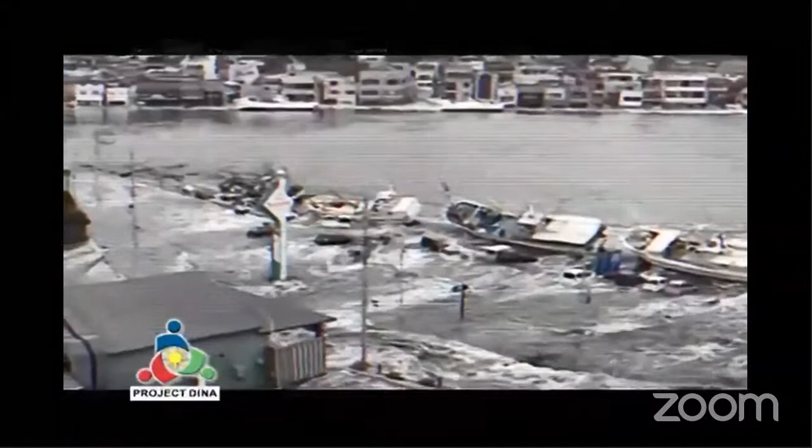Maaari ring magkaroon ng tsunami kung may landslide sa ilalim ng dagat, kung pumutok ang bulkang malapit sa dagat o sa ilalim nito, at kung may bumagsak na bulalakaw sa karagatan.

Ang tsunami ay may bilis na 800 kilometers per hour sa malalim na parte ng karagatan. Ngunit ang alon nito ay mababa lamang at pwede itong bumagal ng 40 hanggang 80 kilometro per hour sa dalampasigan. Maaring tumaas ang alon nito sa 10 metro o higit pa, sing taas ng bahay na may 3 palapag.

Para maibsan ang epekto ng tsunami, magtanim ng mga puno at bakawan sa tabing dagat. Magkabit ng mga karatula malapit sa dagat na naghahatid ng babala at paalala ukol sa tsunami.

Maglagay ng karatulang Tsunami Hazard Zone sa mga lugar na maaaring tamaan ito. Tiyakin ding mayroong directional signs patungo sa mga ligtas na lugar o evacuation sites. Siguraduhin maluwag at ligtas ang mga daang papunta sa mga ito.

Bumuo ng tsunami evacuation plan at magsagawa ng tsunami evacuation drill sa inyong komunidad. Sa pagdating ng tsunami, patunugin ang mga batingaw o alarm para bigyang babala ang mga residente.

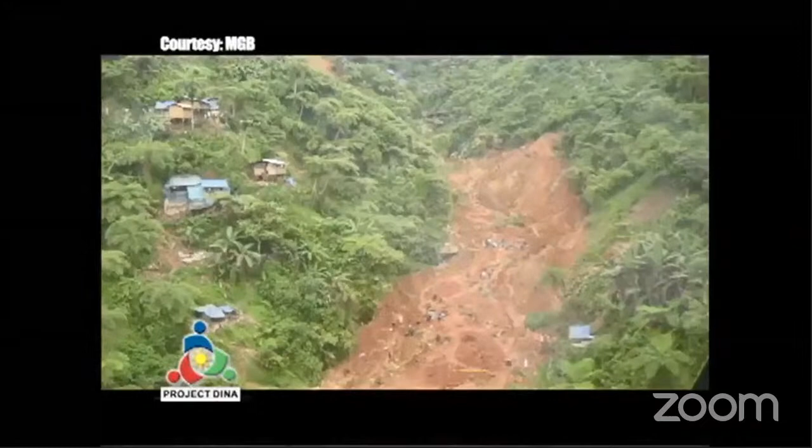Upang maibsan ang mga panganib na hatid ng landslide, huwag magtayo ng bahay o anumang struktura sa mga lugar na matatarik, malapit sa paanan ng bundok, at malalambot na lupa, at sa lugar na may mga history ng pagguho kagaya ng debris flow, debris avalanche, slump, mud flow, rockfall at iba pa. Alamin ang emergency at evacuation plan sa inyong lugar at siguraduhin pag-usapan ito kasama ang pamilya.

Sa oras ng malakas na pag-ulan o bagyo, maging alerto upang maobserbahan ang inyong kapaligiran sa mga senyales ng landslide. Lumikas kung kinakailangan at gawin ito sa madaling panahon, dala-dala ang inyong emergency survival kit.

Habang nagkakaroon ng pagguho ng lupa at ikaw ay nasa loob ng gusali at hindi makalikas, manatili na lamang sa loob at magtago sa ilalim ng mesa o sa matitibay na parte ng kabahayan.

Kung ikaw naman ay nasa labas, iwasan ang marahas na daanan ng landslide at magtungo sa ligtas na lugar. Kung malapit sa estero o ilog, maging alerto sa posibilidad ng biglaang pagtaas ng tubig.

Ang biglang pagbaba mula sa normal na level ng tubig ay maaaring senyales ng pagbara sa may taas na bahagi ng ilog dahil sa landslide at posibleng pagkakaroon ng flash flood o debris flow.

Kung ikaw naman ay nagmamaneho, maging mapagmatyag sa mga bumabagsak na semento, rumaragasang putik at mga nalalaglag na bato. At huwag tumawid sa mga tulay.

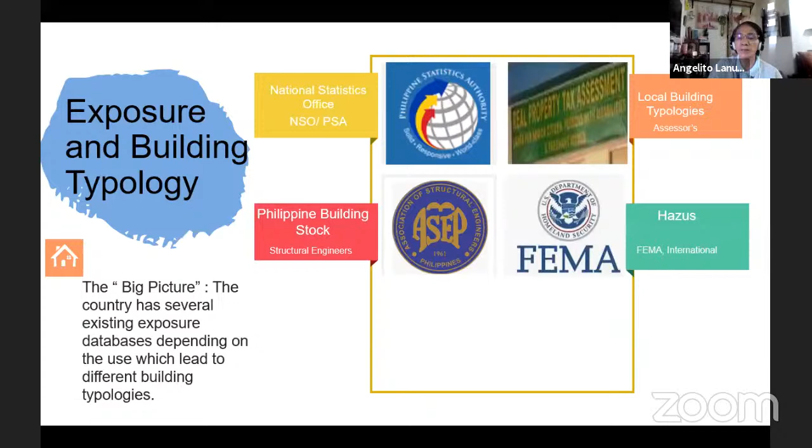Okay, so let's go back briefly to how PSA classifies buildings. The national census is conducted every 10 years.

So one of our dilemmas here: within 10 years, many buildings may pop up, or some hybrids may emerge, creating a gap in our database. And the census is based on number of housing units, not on number of buildings.

It has several approaches and categorization. Basically, it is based on materials, structural components, based on occupancy, and based on attributes such as the floor, year of construction, or the era of construction. That's the NSO's approach.

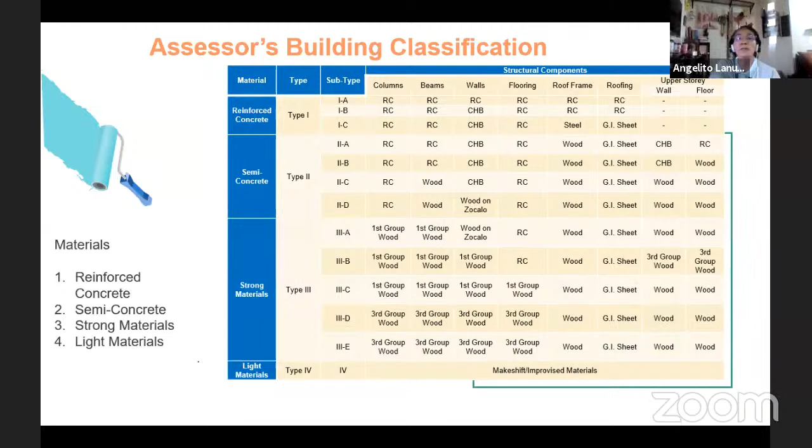So that's the question there, the missing part of this old classification. Although, as I mentioned, the assessor's office classification now has 5 categories to include steel structure.

For engineering building stock categorization, as I mentioned earlier, it is basically derived from the building classification of the US, and the categorization is based on several characteristics. Basically it includes materials - wood, and in this case, there's already the term masonry, and concrete, and steel.

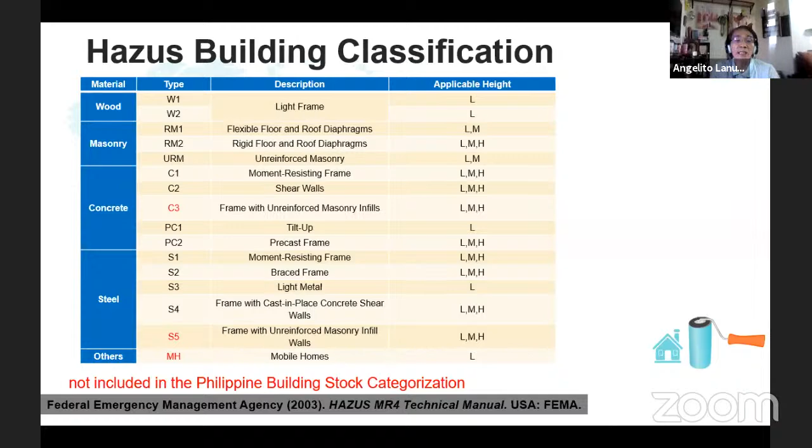If you're going to adopt the HAZUS building classification, it turns out many houses in the Philippines can't really be classified anywhere in it. So, basically, this is the suggested building classification, adopting more than half of the HAZUS or US building classification, in order to customize it to the needs of the Philippines.

So what I mentioned back in 2010 led to this result. So the origin of our new building typology or classification in the Philippines is basically derived from the Philippine building stock categorization, and it has more subtypes due to more details observed on structural types - such as materials, structure, building heights, and the era of construction. Later we'll discuss why there's significance to 1972-1992 in terms of the building code.

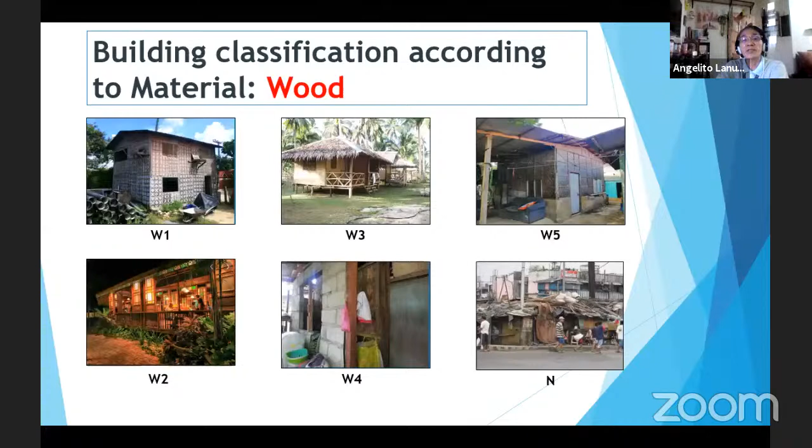Okay, so these are the pictures of W1 or wood one. This is easy enough to understand, or maybe it's already becoming rare because of our logging in the 70s until the 80s. So our wooden structures are becoming fewer. Okay, so that's W1.

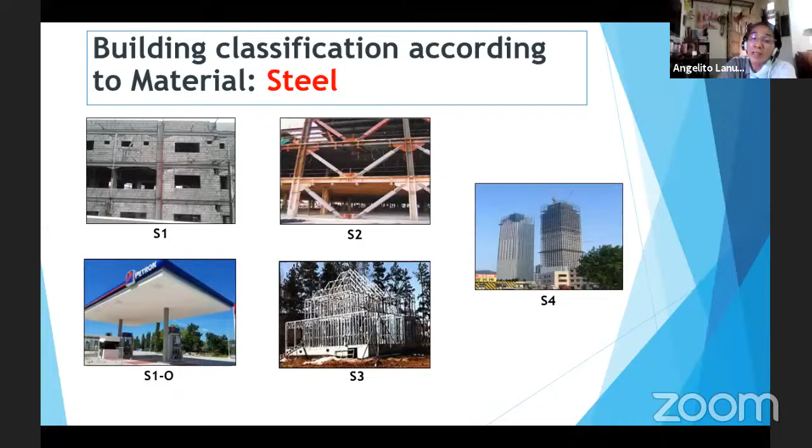They say if your materials are light, it's more resistant to ground shaking. However, we don't know its performance when it comes to severe wind. And then for the high-end, meaning expensive structures - here in S4, we replace concrete with steel beams and columns to form a frame. That's our S4.

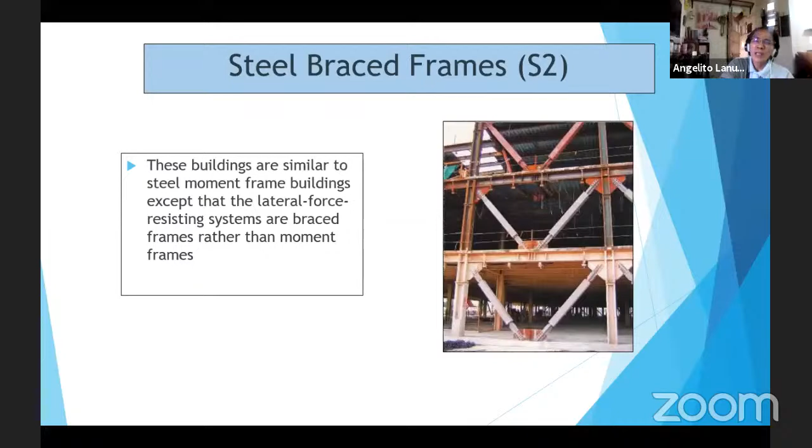So in S2, there's a diagonal bracing system. And then light materials as S3. Okay, this one has a shear wall, or S4 - shear wall again, poured concrete wall.

From all those projects, after our realization in 2010, although this doesn't exist yet in our code or any guidelines for classifying buildings - engineering building classification - this is what we recommended together with UPDI: the Philippine Building Classification, to include structures that truly exist on the ground somewhere in the Philippines. The ones marked in red are what we suggested to be included so we can have our own building classification in the Philippines.

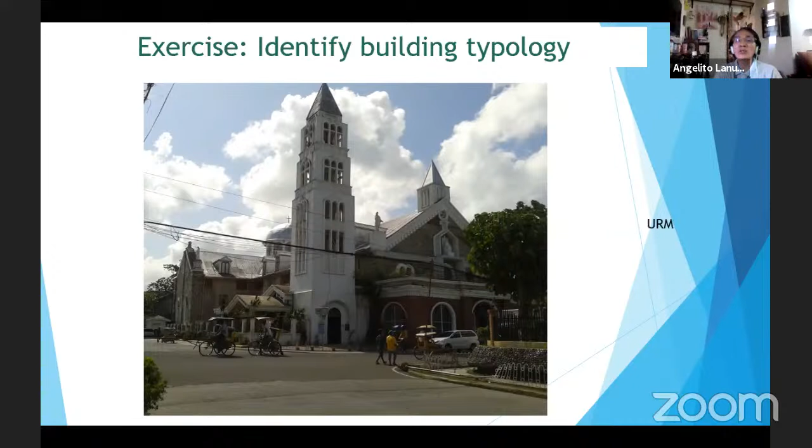Next picture - who can relate to this? Is this W1, W2, or W3? This is W1, because it's purely wood. And okay, this is a combination of masonry and wooden structure - wood on top, masonry at the bottom. Next picture, this one has posts - concrete at the bottom, wood at the top.

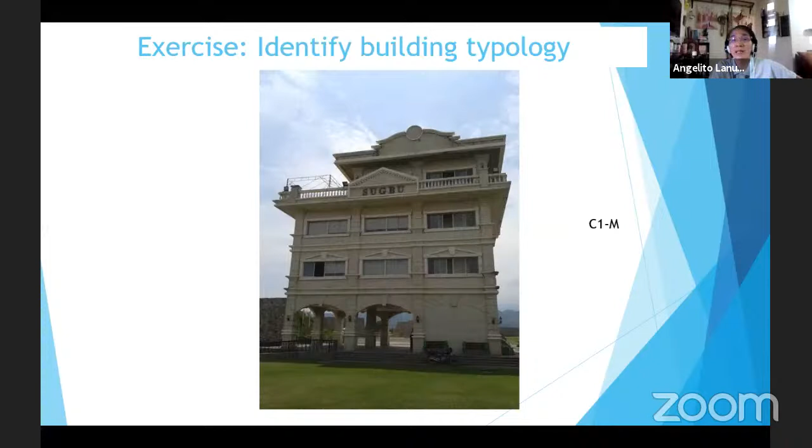This one is common - C1. However, there are some changes - notice it now has M or L. Again, what is L? If it's only two floors with complete frames, it should be C1L. If it exceeds two floors, it should be C1M, since it's medium rise already. Medium rise, let me repeat, is from 3 to 7 floors. And 8 to 15 is high rise. So this is what we call C1 or C4 classification.

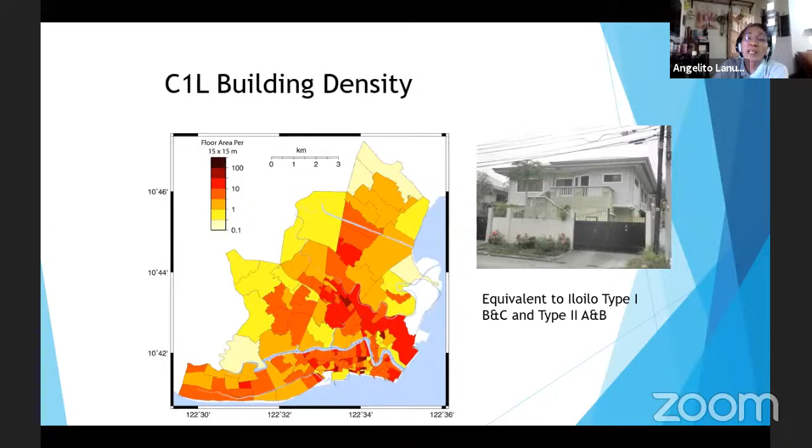Someone turned on a mic it seems. So, that's to get numbers of different building types. Like in Iloilo City, for C1L or concrete houses 1 to 2 floors, this is its density or distribution for different barangays. Then we compare it with the classification from assessors - type 1, type 2, and so on. And we also got C1M, or concrete houses, 3 to 7 floors.

Sa Iloilo City po ito. Ganda, no? Pero 3 barangays lang po yung sinurvey natin dyan. At yun po yung tinatawag na in-applyan po natin ng paintbrushing method para po magkaroon tayo ng mga numero per barangays po. Pero again, yung mga numero na yun ay estimated.

So ito naman po yung concrete wooden structure density for Iloilo City that we have done in 2010. Yung picture po dito sa may bandang kanan, yan po yung equivalent, and then sinamahan na natin ng pagka-type o pagka-classify ng assessor's building classification. Ito po yung W1, no?

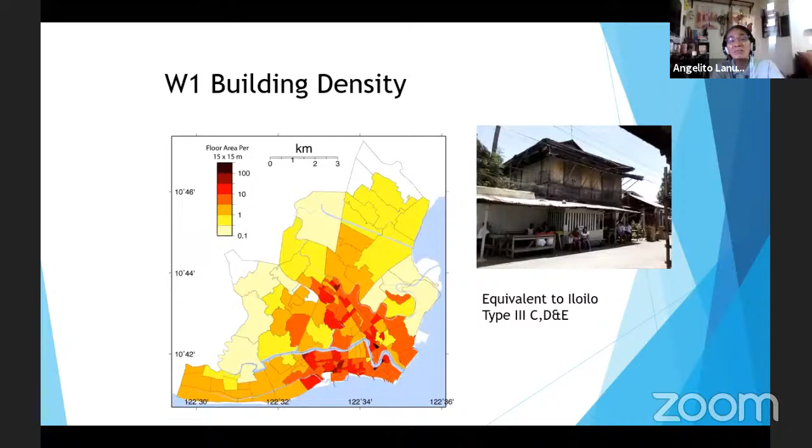Mukhang may nag-on na ng camera. Baka lapse na po ako sa oras ko, so bibilisan po natin to. Sample lang po ito sa Iloilo, no?

Ito po, combining the hazard, exposure, and vulnerability. Meron tayo mga scenario earthquakes, tapos ito po yung distribution of different type, no? And then meron tayong vulnerability curve na we're going to discuss soon. Magkakaroon po tayo ng result na ganyan.

For example, complete damage for this scenario earthquake na magnitude 6.3, magnitude 8.1, ito daw po yung damage in Iloilo City. So sana po lahat ng bayan meron din ganyan mga estimate po. Tapos pwede rin po nakalista yan, yun daw po C1L, 1,600 po ang madadamage, yun daw po C1M, ayan po ay 170 daw po ang madadamage.

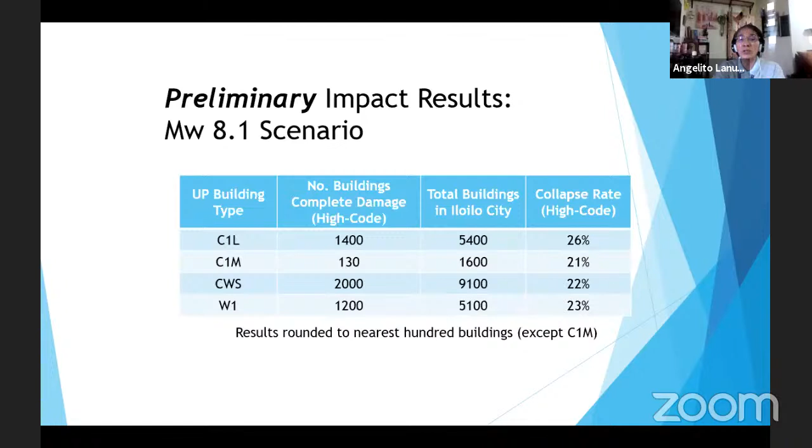So, yan po, sa kakulangan po ng data, ang PHIVOLCS po ay naggawa din po ng mga tool para po makumpleto po natin yung database natin. Ayan, ano? Yung REDAS po ay meron pong EDM mode o EDM para po sana makumpleto po natin yung ating exposure database o yung tinatawag nating building database.

Meron din po yan online, submission po ng data through our GeoMapper exposure data mapper po. And it can be done using mga street view or any po geotag pictures of the buildings. So again, eto po, maganda po sana kung inyong bayan

Magkaroon ng database po, yung bandang gitna, eto, no? And then, kami naman na po, together with the UPDIs, ang magpo-provide nitong vulnerability curves para po magkaroon kayo ng mga numero na ito. Okay? Sa bandang kanan. So, ito pong vulnerability curves na sinasabi ko, picture-picture na lang po ipapakita ko sa inyo.

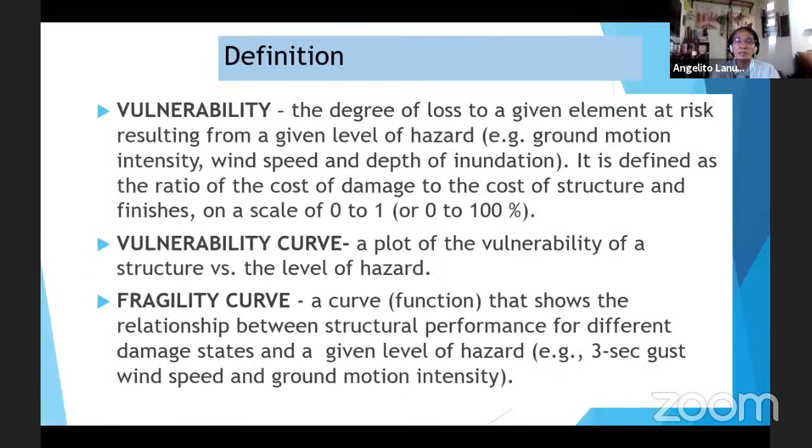Okay? Ito po ay, as I have mentioned, we can skip this, the mga definition of terms. Vulnerability po means only ganito lang. For intensity 9 daw po, kung ano man po itong graph na to na klase ng building, ang babagsak daw po ay more than 50%. No? Ito po, titingnan natin dyan.

So if you have the number at intensity 9, alam po ninyo kung ilan po yung babagsak in or madadamage sa inyo pong bayan. Ganyan lang po ibig sabihin ng vulnerability curve. At ginawa po ito ng UP sa ganitong pamamaraan o method po.

Vulnerability curves, ginamitan po nila ito ng empirical formula. Ibig sabihin po, ayon pong mga pangyayari in the past na I don't know kung included na po yung 1990 earthquake dyan, for each, parang binilang nila yung ganong klaseng type ng building, ilan ang bumagsak, nung mga nakararaang lindol po. Yun po yung empirical.

Computational naman po, this is masyadong math ito, kaya hindi na natin ipapakita dito. Computational means lahat po kasi ng mga structure, meron po yung pagiging marupok o kahinaan. Ang tawag po natin doon ay yung fragility curve. May kanya-kanya pong pagiging pagka-fragile bawat structure po. Tapos, so basically, yan po yung ipinasok dyan sa computational.

Ito naman pong heuristic, dahil po sa kakulangan ng data natin, kinolekta po ni UPDIs lahat po ng mga experts, civil engineers, architects, and then magpapakita po sila ng picture of building type, and then sasabihin nila at what intensity level babagsak yung ganong type po. Tapos kinolekta po natin yung opinion ng mga experts at yun po yung tinatawag nating heuristic method po.

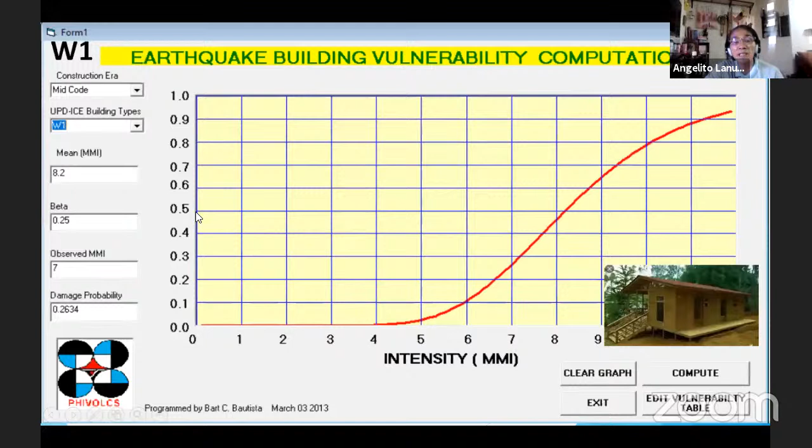No? Ang titingnan natin dito sa may bandang kaliwa. For W1. For W1, yung bahay kubo po, sinasabi at intensity 8, kalahati po. Kung may 100 kayong ganyang building in your municipality, so 50 po yung posible na pong bumagsak at intensity 8.

Ito po yung intensity 8. Intensity sa baba, at ito po ay yung makeshift natin, or N. So at intensity 8 daw, dito natin i-concentrate. So 60% of this kind of structure ay pwedeng masira na. Yan po yung vulnerability curve.

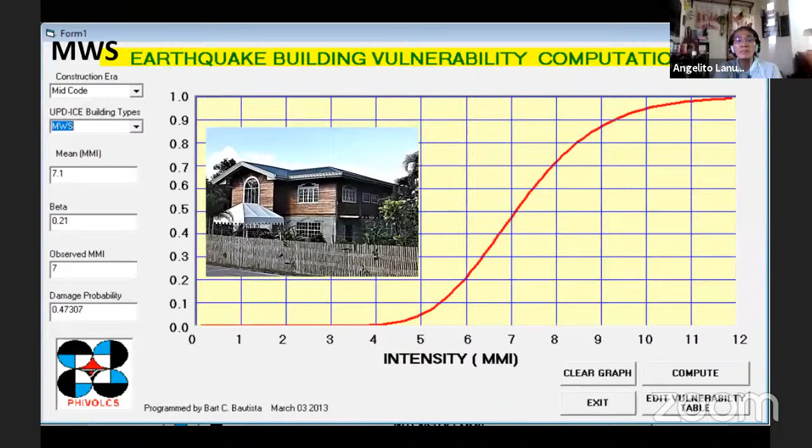At ito yung MWS natin, sinasabi dito na ganun din, 50% of this type of structure ay babagsak na po ay at intensity 7 pa lang. 50% na. At ito yung classic example natin, even last time, yung CHB houses natin at intensity 7 ay kalahati na po ng kung ilan man meron tayo nito sa ating munisipyo.

Okay, ito namang mga Ivatan houses, 40% at intensity 7, or shall I say 60% of this type ay pwedeng maapektuhan ang ganitong klase ng structures.

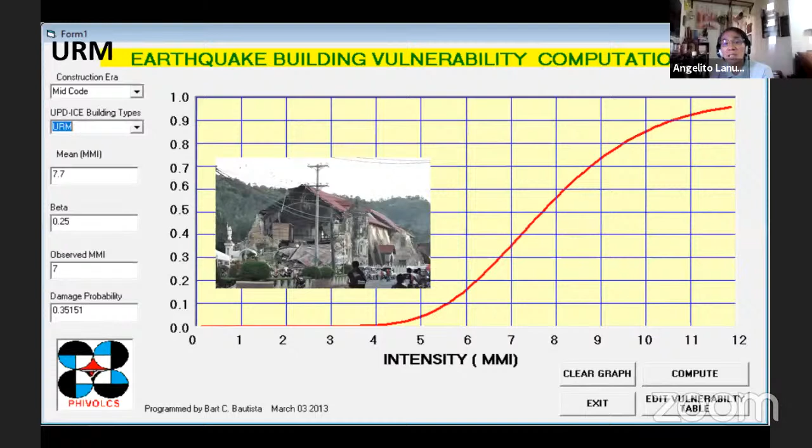Ito naman po ay actually yung picture nito, is actually the damage of the 2013 Bohol earthquake, in Bohol. So yung ganito daw po yung URM natin, or the unreinforced masonry, mga historical churches natin yan, at intensity 8 daw, ang babagsak dyan ay close to 60%.

At ito naman ate, ito yung CWS, or the concrete wooden structure, at intensity 8 daw, it is around 54% daw po ng ganitong type ay babagsak ang intensity 8.

Ito yung common na si C1, pag 1 to 2 story, L siya. So mukhang medyo matibay-tibay ito. At intensity 8 po, 40% lang yung pwedeng maapektuhan at intensity 8.

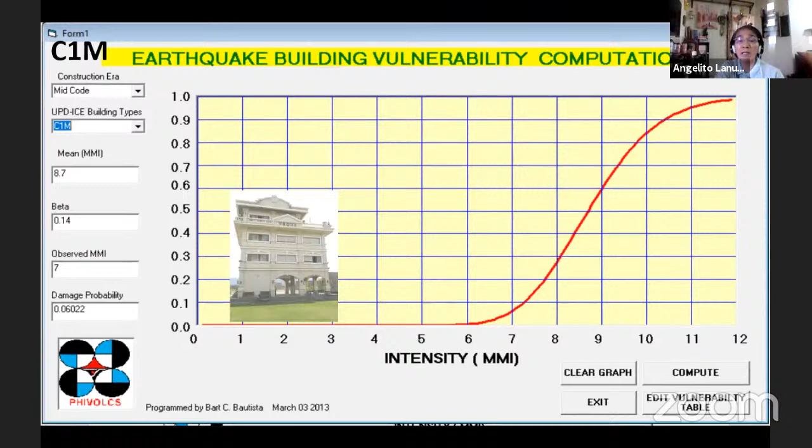Ito yung kahit tumaas na siya, parehas lang din ito nung sa C1L. Ito naman intensity 8, 30%. Ibig sabihin, medyo engineered po yung mga ganitong structures.

At ito naman po ay sa C4M, 40% of this type can be affected at intensity 8. The same with this type C4H, at intensity 8, around 40% of this type can be affected by an intensity 8 shaking. For the mga precast natin, ito ay sinasabi na intensity 8 is around 34% ang pwede pong maapektuhan at intensity 8.

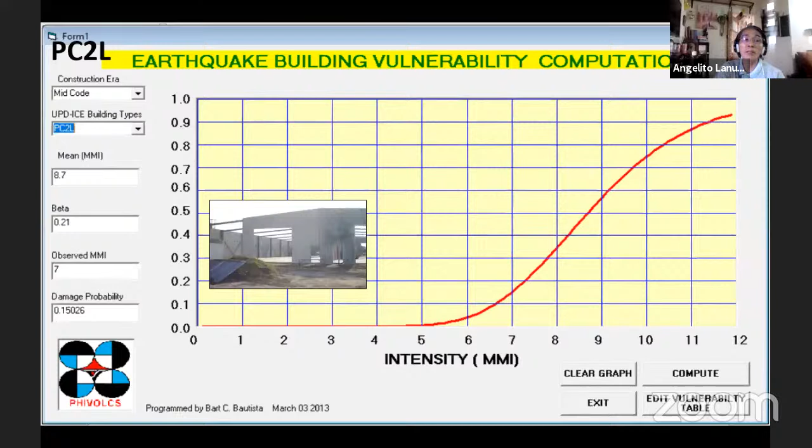Ito naman sa ating another precast type, at intensity 8 daw ay mga around 47% ang pwede maapektuhan po nito. Ganyan lang po si vulnerability curve.

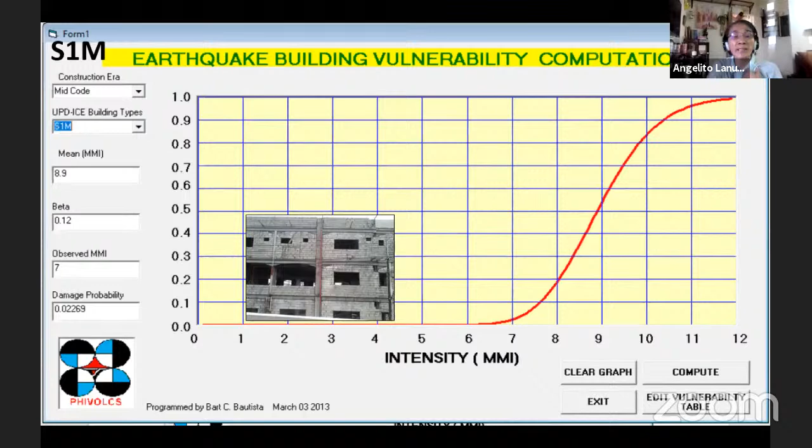For our S1, o yung poste at beam, gawa sa bakal, at intensity 8, 40% of this may be affected by intensity 8. At ito naman pong bakal ang poste at beam, at intensity 8, matibay pala ito. So 20% lang ang pwedeng maapektuhan po nito.

At sa light materials, mga 28% po ang pwedeng maapektuhan at intensity 8. At for the another light materials din po na medyo mataas lang, ay nasa less than 30% na pwedeng maapektuhan at intensity 8.

Ito, mga sample na lang po ito. For example po sa Mindanao, meron po kasi tayong software na nakapasok na dito all those 18 vulnerability curves of 18 building types na ini-introduce namin, hopefully, shout out sa ating mga engineering group, hopefully ito na po yung i-adapt ng engineering group natin so that very much harmonized tayo. Kasi kung nakapasok na po ito dito sa software na ito, magse-senaryo tayo ngayon para makita po natin yung ilan po ang maapektuhan sa inyong munisipyo.

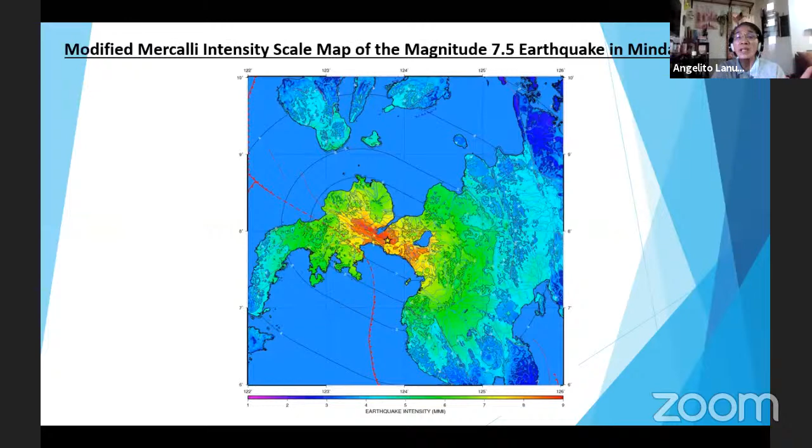For example, ito po, scenario earthquake natin is the 7.5 earthquake in Mindanao Fault. Iraran po natin yung REDAS software, at ito po ang kalalabasan niya na intensity distribution done by that software, REDAS. Tapos po, ipapasok po natin yung vulnerability curves na yon. Tapos po kung meron lang kayo sanang exposure database o building database, then sana po dito makikita natin ilang ganong klase ng building ang maapektuhan.

Andito po, numero natin makikita. So including po yung mga effect po sa tao, like including fatalities, ilan na posibleng mamamatay sa ganong size ng earthquake, ganun po. At ito po another scenario earthquake po dito is 7.3 earthquake along the Lanao Fault System.

Nag-example na lang po tayo. This is the possible intensity distribution of that size of an earthquake. Tapos po, meron tayong result ng fatalities, mga ganyan po. At mga injured, yung mga non-life threatening po, pero still affected siya, na ganyan po.

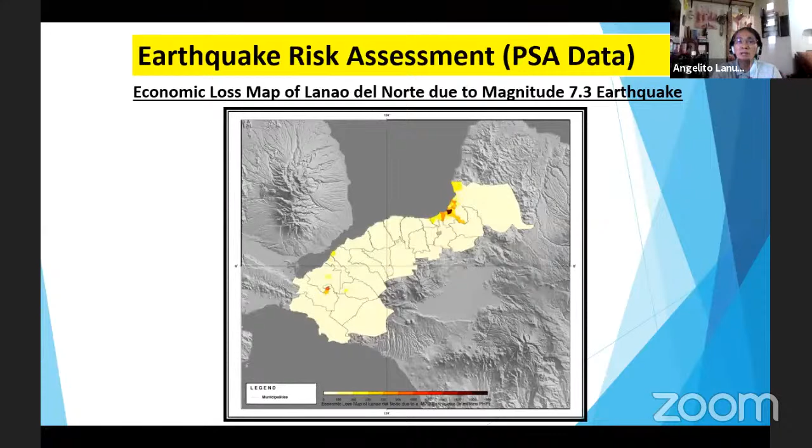We can also plot po yung distribution of this risk or affected. Yung physical damage din po, pwede nating i-plot on a map. So it will guide all the planners of the local government units, including barangays. Wala pa yung lindol, na-estimate natin na yung ganito po. So nakikita natin kulang data, no po, sa inyong mga bayan-bayan. Casualties din po can be plot by the software like this. At pwede po natin siyang in tabular form per barangay, actually in terms of damage.

At pwede rin pong gamitin yung mga numero ng different building typologies na aking na-discuss. So patikim lang po yon, pero hindi na po natin i-elaborate kung paano natin gagawin dito yung impact assessment.

So in summary, yung scenario earthquake po ay na-discuss na noong June 15. Ngayon, ang ating pinag-focusan ay sa building types o yung tinatawag nating exposure database. Na-discuss ko rin sa inyo yung different vulnerabilities na nagkaroon na ng vulnerability curves. Sa ngayon, para sa earthquake vulnerability, 18 building types pa lang o 18 vulnerability curves pa lang ang available. Out of those, ito yung ating rinerekomendang building classification sa Pilipinas.

Yung introduction to earthquake impact, nagpakita lang po ako sa inyo ng resulta kasi isa po yan sa kahihinatnan na sana lahat ng bayan-bayan ay mayroon ding ganyan. Ano po ba itong impact assessment na ito?

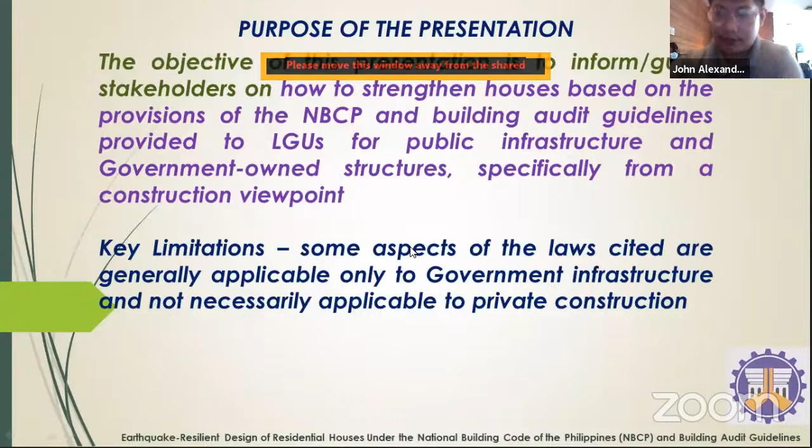A few things first before we begin: some of the materials don't belong to me, so I'm using these under fair use. You'll notice from time to time that I'm not going to discuss in depth some topics because I don't have permission to. So let's get on with the presentation.

Now, what is earthquake resilient design? In the construction industry, earthquake resilient design incorporates practices and procedures empirically shown to mitigate the physical damage and other adverse effects of seismic events on structures, by employing methods calculated to preserve its integrity and stability and to afford a certain degree of protection to its occupants. So we'll be talking about earthquake resistant structures, but not really the structural aspects—more on the law enforcement aspects.

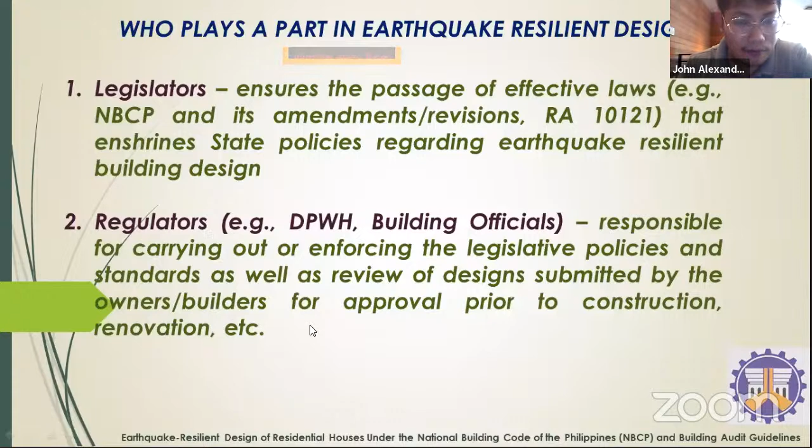Of course, very important are our property owners, because they have the final say in key aspects of the design, such as requirements, budget, selection of key personnel involved in planning and implementation. The owners are also responsible for ensuring that decisions regarding the design, construction, and operation of their structures are in conformity with rules and regulations for earthquake resilient buildings.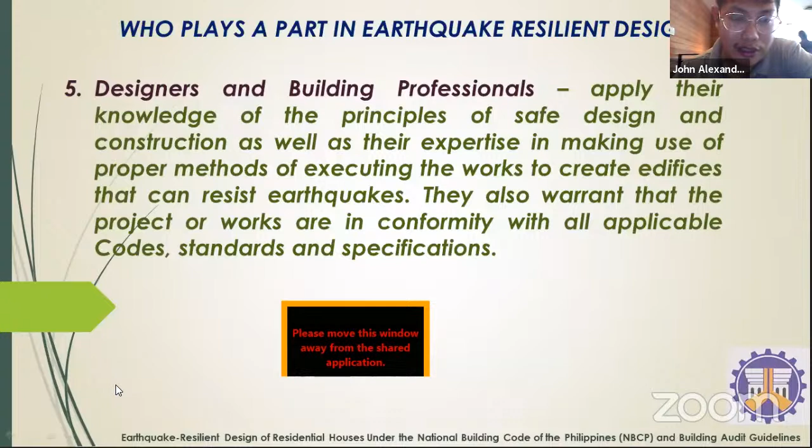Foremost, I think, in this case, are the designers and building professionals. They have a big say in ensuring that the principles of safe design and construction, as well as expertise, are applied, and in making use of the proper methods of executing the works to create edifices that can resist earthquakes. They also warrant that the project or works are in conformity with applicable codes, standards, and specifications.

For purposes of discussing the building code, we need to look at what kinds of factors come into play in our design and construction. We can divide this into two: uncontrollable factors and controllable factors, and you'll see later that this distinction is very important in designing our buildings and even in implementation.

So what are uncontrollable factors? Not all aspects of design and construction regarding earthquake resilience can be foreseen, and even if foreseen, sometimes they cannot be avoided. They are therefore totally or partially beyond the reach of human skill and intervention. No matter how skilled we are and how good our design is, there are factors we really cannot predict, so nevertheless we still have to take them into consideration.

Since these uncontrollable factors cannot be accurately predicted or avoided, one of the objectives in designing earthquake resilient structures is to mitigate their effects. How do we do that? Sometimes it really falls into the category of force majeure, because when it comes to our failures or untoward events, we may have designed very well but there are just some events we really cannot prevent, and they take the nature of force majeure or acts of God.

Some examples of these uncontrollable factors affecting the design of earthquake resilient buildings are, first of all, the location of fault lines. That's part of the geology of our country. Even though we have the choice to select many things, one of the things we cannot choose is the location of the fault lines, and we have to factor that into our design.

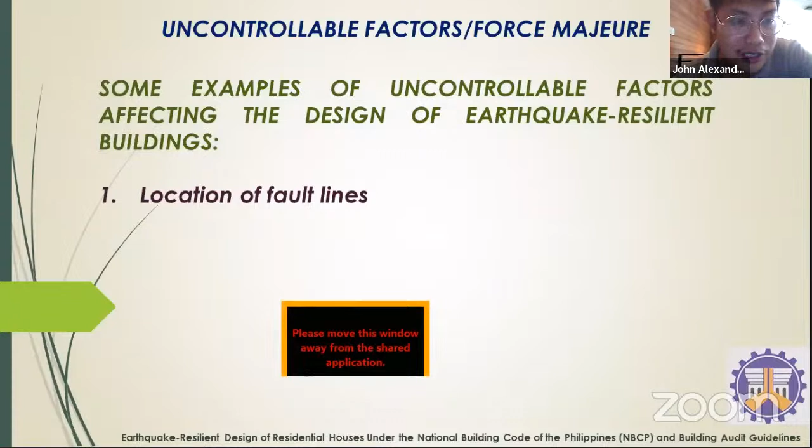Second is the distance, frequency, duration, and severity of seismic events. Then the geotechnical properties of the soil or strata under consideration as revealed by investigation, such as normal soil bearing capacity, and the susceptibility of soil to liquefaction.

So why are we discussing these uncontrollable factors? Because of course, we have to consider them in the design. We're going to take into account how we are also going to minimize the effects of these uncontrollable factors.

Let's discuss a bit about liquefaction. This is soil liquefaction, a phenomenon which occurs when a saturated or partially saturated soil substantially loses strength and stiffness in response to an applied stress, such as shaking during an earthquake or other sudden change in stress condition, in which the material that is ordinarily solid behaves like a liquid.

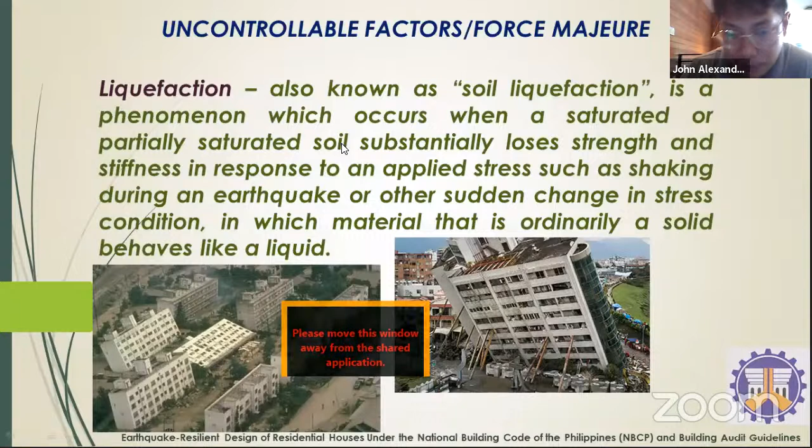So how do you mitigate the effects of uncontrollable factors? There are still some ways we can mitigate these undesirable effects. First is legislative or executive action, enforcement, and stakeholder compliance and support. That's the very first thing we do to try to minimize the effect.

Aside from studying that, we go from the top. We have to acknowledge that these factors really exist, as well as the importance of mitigating them. What we can do is institutionalize policies or measures to this effect by passing appropriate laws, administrative issuances, and expecting our stakeholders to comply. Once the aforementioned laws and regulations have been passed or issued, the proper regulatory or enforcement body ensures the execution thereof in order to achieve the stated goals. However, for the said laws and regulations to have the desired effect, stakeholders must still support in the faithful observance of the same.

So what is an example of action to reduce earthquake risk factors? Declaration of danger areas, no-build or hazard zones, by law, ordinance, and regulations. In our building code, we look at the input of other agencies.

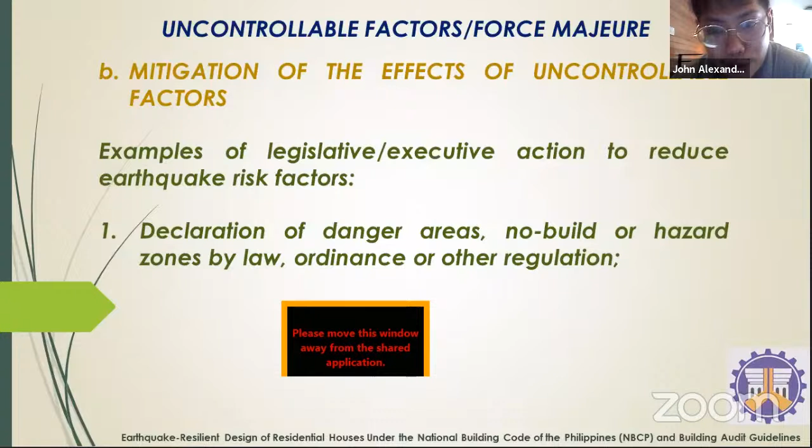Baka pag mag-apply tayo ng building permit for our structures, hindi pala pwedeng ilagay doon yung ating structure because it's already declared to be a danger zone. Okay, another one, mandatory requirement of soil testing for certain types of construction. And of course, annual safety inspection and monitoring.

So you have to identify first the uncontrollable factors, for example, actual seismic events. And then you have to determine the aspect of building design or operation affected.

Then the identification of the technical and legal basis. So under the NBCP, we have to ensure that our buildings follow the safe construction principle.

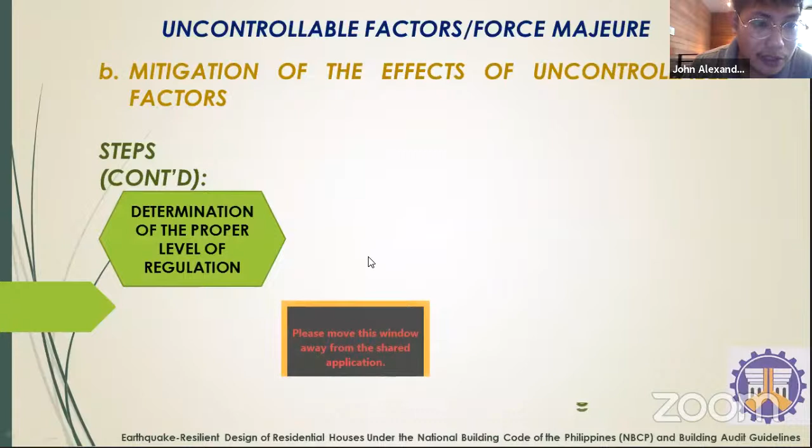So the continuation, determination of the proper level of regulation. Excuse me, let me minimize this. I think I have to move this to the side.

So determination of the proper level of regulation. Kung kaya naman pong administrative regulation yung gawin, wag na po tayong mag-insist na gawin siyang batas. So consultation, research, feedback from experts and stakeholders like building professionals, and then we adopt the recommendations and promulgate the appropriate law or issuance. So we have a memorandum circular, for instance, that came out a few years ago on earthquake recording instrumentation, and then of course there's an expected enforcement and compliance.

So a bit about this memorandum circular. We required certain kinds of buildings to install accelerometers and other recording instrumentation for earthquakes. Don't worry, hindi naman po covered yung residential dito as far as I know, kasi minimum po na height ng buildings na covered is 50 meters, and for ordinary stakeholders yung ating mga houses hindi naman po ganyan kataas.

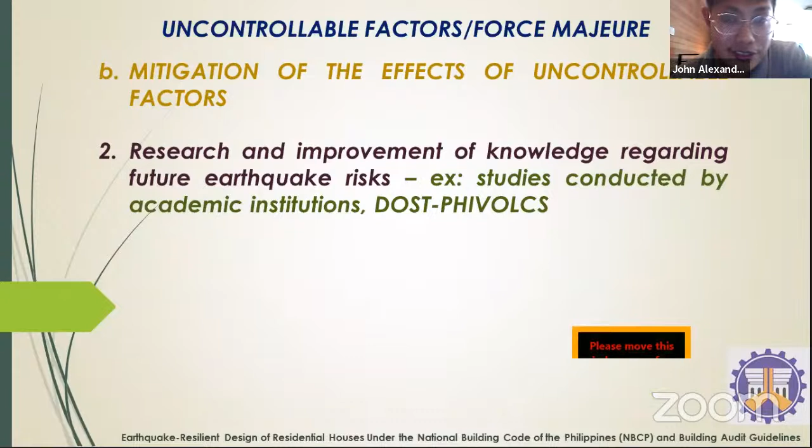So another thing that we can do is research and improvement of knowledge regarding future earthquake risk, such as studies conducted by academic institutions like DOST, PHIVOLCS. So another is the ones that we're doing right now.

Yung dissemination of information to stakeholders such as public service announcements, seminars, bulletin boards, and posters in public places. Kasi as you know, yung technical knowledge dito sa ating earthquakes and the earthquake resilient design is not generally available to the public. So that's why we're holding this kind of seminars and information.

And then ano po yung limitations ng knowledge natin, makikita din po natin yan. So these are some of the informations that are disseminated.

Now for designers naman po, we design with assumptions allowing for contingency or uncertainty, such as introductions of factors of safety. So marami po tayong mga buildings na kung sasabihin natin, medyo over-designed kasi nga may mga predictions in the future na this will not be adequate, or even just allowance. So these are some examples of factors of safety.

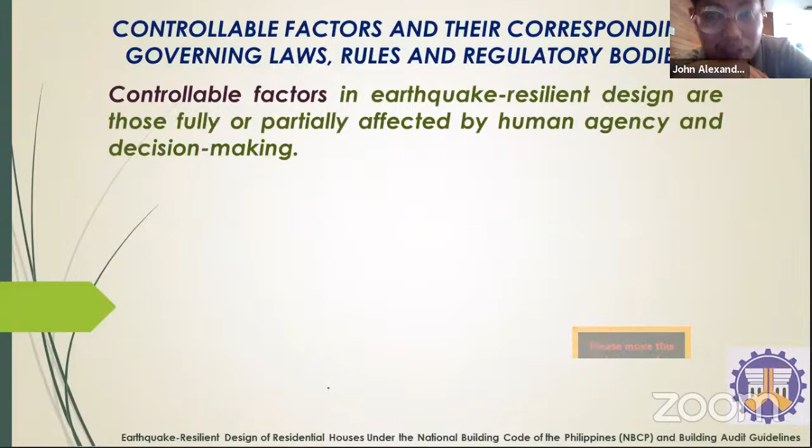Now, let's go now to the controllable factors, and the corresponding governing laws, rules, and regulatory bodies involved. What we call controllable factors in earthquake resilient designs are those fully or partially affected by human agency and decision making. However, it doesn't mean that since mas malaki yung control natin dito, we can just do whatever we want.

The choices or options available to owners and designers to maximize their utility or degree of control over the same are not unlimited. Please highlight this one. In some way or another, meron pong government regulations to serve an interest equal in importance to the protection of life and property. So the limitations imposed on the designer or owner are no longer caused by extraneous factors but by regulations.

So if you're the owner of a property, yung ating talagang instinct natin is of course self-preservation. Sometimes wala tayong pakialam sa rights ng ating neighbors, but we still have the obligation to respect the property rights of adjoining owners, including the government, by not making the building too large so as to diminish the legal spaces or easement to which the latter is entitled. So merong aspects sa design that states na i-maximize natin yung property natin, and we're aware naman po na most of the property owners that we have don't have large land holdings.

So hindi kahit saan pwedeng mag-select ng site para mag-erect ng structures. But at the same time, in order to limit these rights and protect the rights of others, merong mga controls na introduce, yung rules and regulations. So bibigyan ko po kayo ng examples, baka mag-away ang mga neighbors.

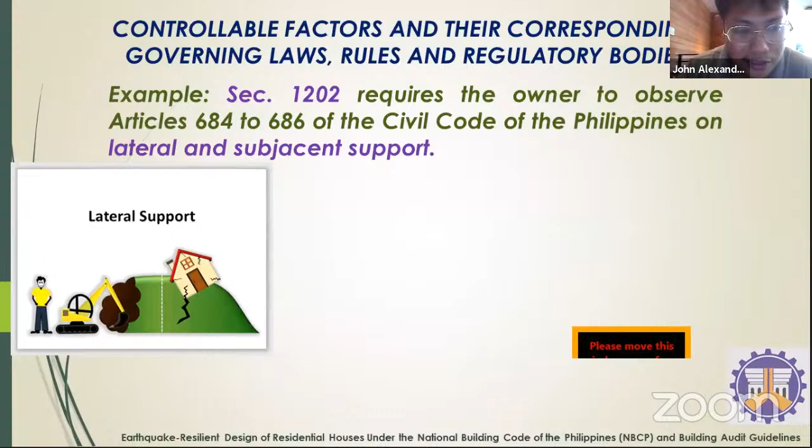Good example nito yung article sa Civil Code on lateral and subjacent support. Baka sa proseso ng pag-design ng magandang foundation para earthquake-proof ang building, yung adjoining property naman ang magko-collapse. So may obligation yung designers and owners, at saka construction personnel involved, na i-take into account yung weakness ng property sa kabilang side ng fence. Baka magkasuhan ang neighbors dahil sa proseso ng pagpapalakas ng structure mo, magko-collapse naman yung sa kanila.

Very common po ito sa cases kung saan magkatabi ang property, at ito ay dapat i-take into account ng designers and owners. Actually very common na mag-away dito kasi minsan yung foundations natin, kapag hindi natin tinignan ng maayos yung pagkakagawa, baka nag-encroach sa properties ng neighbors.

So whenever the depth of excavation of construction is such that lateral and subjacent support of adjoining property or existing structure will be affected in a manner that the stability and safety of the same is endangered, the person undertaking or causing the excavation shall be responsible for the expense of underpinning or extending the foundation or footings of the property or structure.

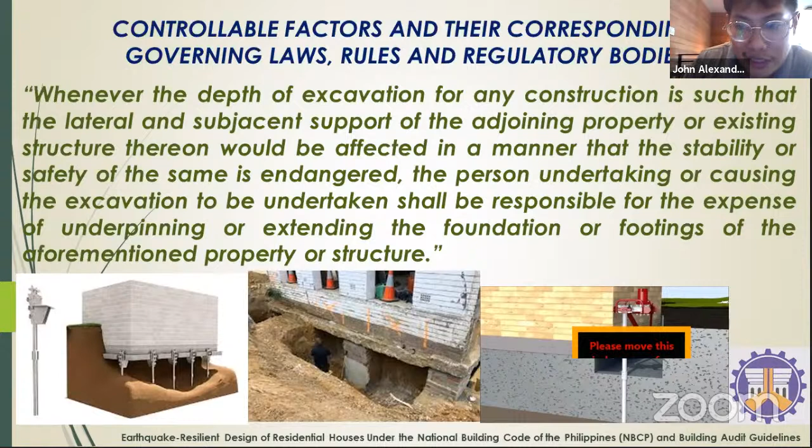So in addition sa ating own property, dapat tignan din natin yung support ng magkatabing property. If ever na kailangan nating mag-excavate para ma-reach yung point na maganda ang strata o para i-improve ang foundation, dapat siguraduhin na hindi apektado ang properties ng ating neighbors. This is an example of the limitations of the controllable factors pagdating sa design.

Isa pang limitation: to employ only materials, specifications, or construction methods approved by the proper regulatory bodies, and not to use one's own judgment in a manner that circumvents the normal discretion which the said bodies are duty bound to exercise. Alam naman natin, maraming paraan para mag-strengthen ng building, pero kapag hindi approved, wag na nating gawin, kasi even the methods of construction are also reviewed by ating building officials.

Kung hindi yan approved, kahit sa theory ay magandang method, kahit sound ang materials, hindi pa rin dapat gamitin kung hindi approved. So dapat mag-exercise tayo ng caution bago natin gamitin. Ito ay applicable whether public or private buildings, subject sa regulations yung material specification at construction methods, makikita natin yan sa code mamaya.

Good illustration nito: there is a provision in the National Building Code requiring the first floor of a habitable multi-story building to have higher minimum ceiling height, 2.7 meters, compared to the succeeding stories. Kaya kapag napansin niyo, pumapasok tayo sa mga buildings, mas mataas talaga ang ground floor — legally speaking, ito ang reason, na-require na mas mataas ang ground floor kumpara sa succeeding floors.

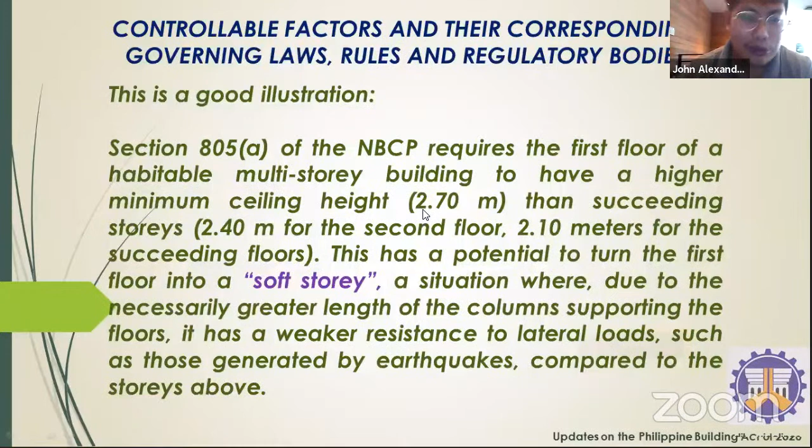Isipin niyo yung column na hindi masyadong mahaba — since it's not very slender, mas malaki ang resistance niya compared sa slender column. To show you an illustration: sa mga stories above, mas maikli ang distansya ng floor to ceiling compared sa first story.

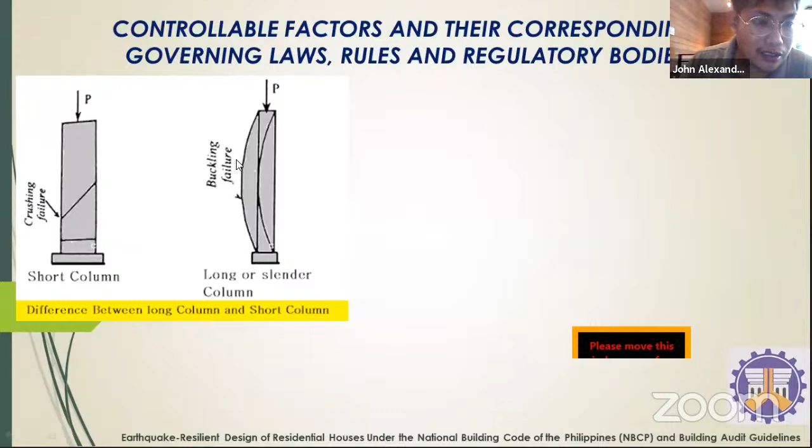Let's look at the principle involved here. If it's a short column, there could be this kind of failure. If it's a long or slender column, it will buckle. This is an example of buckling - it might bend and then break eventually because it's very long and very slender. The floor-to-ceiling height has something to do with that.

Our normal reaction is that the owner will really want to save money, that's one consideration. But the owner cannot simply reduce the ceiling height of the ground floor to strengthen the first floor structurally, even if it's more economical, because the law already provides 2.7 meters as our minimum. So should he wish for the first floor to have comparable lateral strength to succeeding floors, he has to find an engineering solution that also complies with the code. He has to maintain the height of the first floor.

Some other things he can do: he can raise the height of the other floors to also be 2.7, or increase the strength of the structural supports of the first floor. What this means is, even though there are engineering solutions to ensure that the building has the required strength, there are controls or regulations, and you'll see that all over the building code. So owners sometimes get frustrated - they want to save money, they want to maximize the use of their property while increasing the strength, but there are some restrictions.

So let's just think that safety is not the only consideration of the building code, and you will see later on there are actually a lot of considerations that go into the code. If we look at it, safety is foremost, but not necessarily, because there are many factors considered when it comes to design. So that's one example, the soft story.

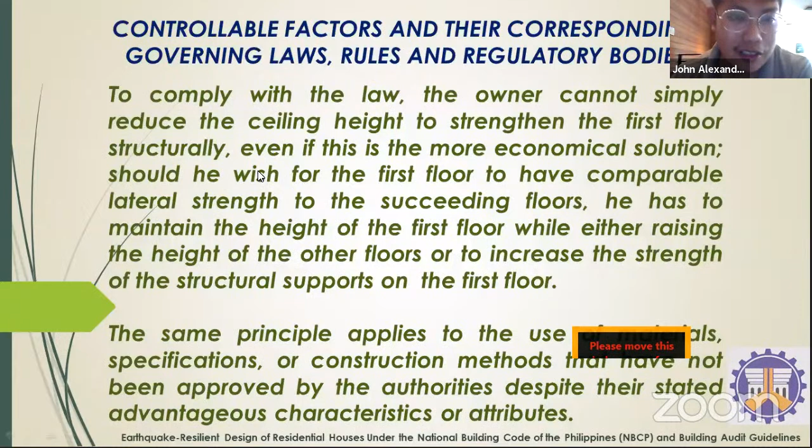The same principle applies to the use of materials, specification, or construction methods. If they're not approved, again, they will not be allowed to be used - even if the materials are not approved, even though we can provide proof that studies have shown that this is actually better. So these are some things we should keep in mind.

So what are examples of controllable factors? We have the choice of location or building site. Although we cannot control, for example, fault lines, we still have a choice of location or building site. Another is the adequacy of the design - as long as our design is good, that's under our control. Quality of materials is another, then proper construction methods is another.

Then appropriate quantities and specifications, proper use and timely inspection and maintenance, and then the competency of technical personnel. All of these controllable factors have corresponding regulations, and most of them are governed by the building code when it comes to building design and construction.

Now when it comes to technical personnel in our building code, I cannot discuss in detail all the provisions here for want of time. But our building code discusses the obligations of our technical personnel when it comes to building design, construction, maintenance, and operation. Some of the things not controlled by our building code when it comes to technical personnel are of course the qualifications - not all qualifications reference the building code mostly, it's the appropriate professional regulation laws.

So when it comes to choice of location or building site, the owner has the responsibility to select the location or site for the building, assisted by geotechnical investigation, and subject to the requirements of NBCP and its IRR on siting, orientation, developmental controls such as floor area setbacks and building height. These developmental controls will be seen in the building code and the IRR, regarding the site of the building.

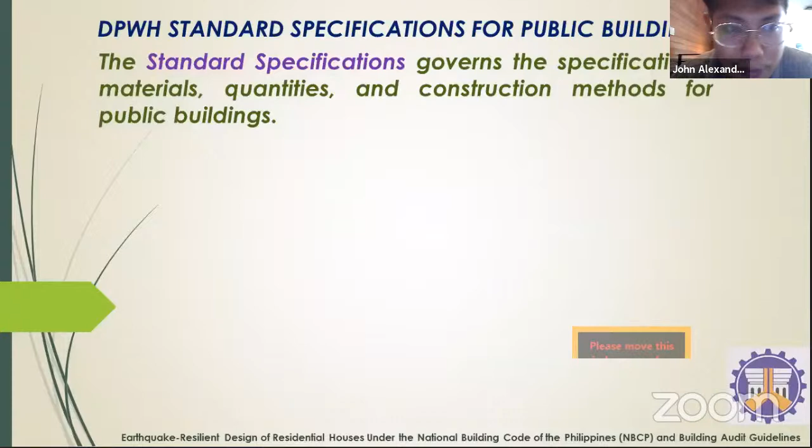So that's updated by our department from time to time, and you're also free to use that as reference for private constructors. As the name implies, these are not mandatory for private buildings, the items of work we're discussing, unless specified by contract.

Builders or owners typically have more leeway over design, construction, and operations of their building compared to government or public sector. However, the standard specification provides parameters by which private builders may measure the adequacy of works comprising the building, because what's in the blue book has already been studied and indicated to be good quality.

Now, the structural adequacy of the building is reviewed by the local building official with the assistance of the civil structural section. So if you want this reviewed, when you apply for a building permit, it gets checked by our local building officials.

Additionally, in the future, it is intended that certain aspects of construction contracts for private infrastructure be standardized. So later on, we're actually doing some things to make the construction contract standard, certain aspects of them, so it can be used as a reference, and at the same time, uniformity in enforcement.

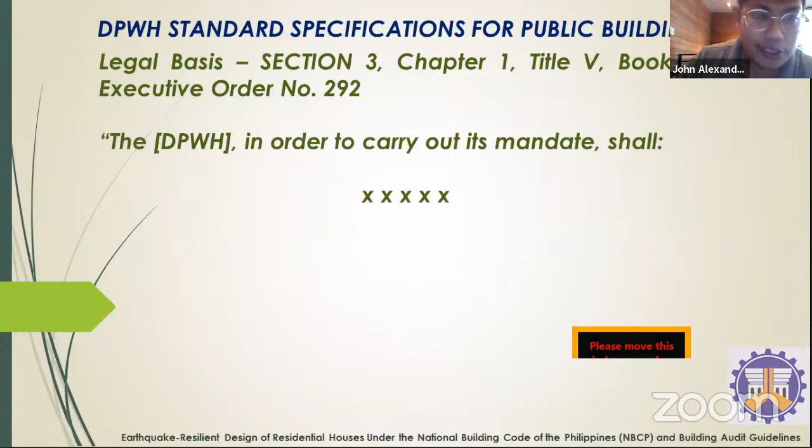So what's the legal basis for DPWH issuing specifications? That's Section 3, Chapter 1 of Title 4, Book 4, of Title 5, Book 4 of the Administrative Code, EO number 292.

So to carry out its mandate, the Public Works and Highway shall develop and implement effective codes, standards, and reasonable guidelines to ensure the safety of all, please take note, public and private structures in the country, and ensure efficiency and proper quality of the construction of public works.

Many people ask, is the private sector covered here when it comes to standards? Actually, it's not that we're imposing the specifications on the general public, but please take note of the guidelines and standards here - these are already applicable to the public from a technical standpoint, not from a legal or enforcement standpoint, but from a technical standpoint, it can be used as reference, and this is the basis for that.

Another factor within the control of the property owner or designers is proper use and timely inspection and maintenance. The operator of a building should not use or convert it for a purpose it was not designed for. You'll see this in the building code - there's specific use and occupancy. In fact, it states most of the time how many occupants, how many people should be there.

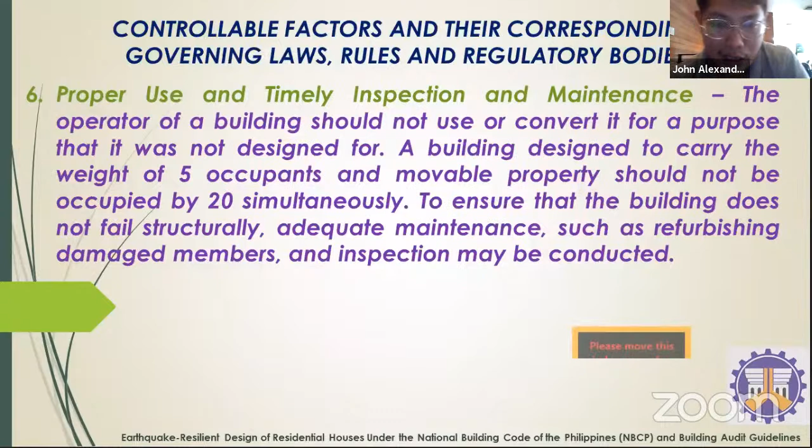So what we have to do is adequately check. We have to check for defects in the building, conduct inspection to see if it can still be used for that purpose. So sometimes it's not the design that's the problem - sometimes it's the age of the structure.

Then lastly, the competency of technical personnel. Design and execution of the works shall be under the direction of registered professionals. That's also stated in our building code - and skilled technical personnel in order to ensure the quality and adequacy of the same, such as civil engineers, structural engineers, etc. We can see this during the planning stage of the building project.

During the planning stage of our house project, we approach professionals - that's the usual way of doing it, and that's the proper way of starting the project. So we give our ideas, and then they also design around those parameters. So the responsibility of our professionals - of course, they sign the plans to be approved.

During the construction stage, it should be under the direction of a professional - that's also stated in the building code. So that's also for the protection of the owners, the protection of the users of the building. So they are actually warranting the quality of the buildings.

Controllable factors are regulated by laws, principally by the National Building Code of the Philippines. If you have the time, you can read this. I can't discuss everything because this is a very lengthy technical and legal document, but there are provisions that show we're serious about controlling these factors of design for the protection of everyone.

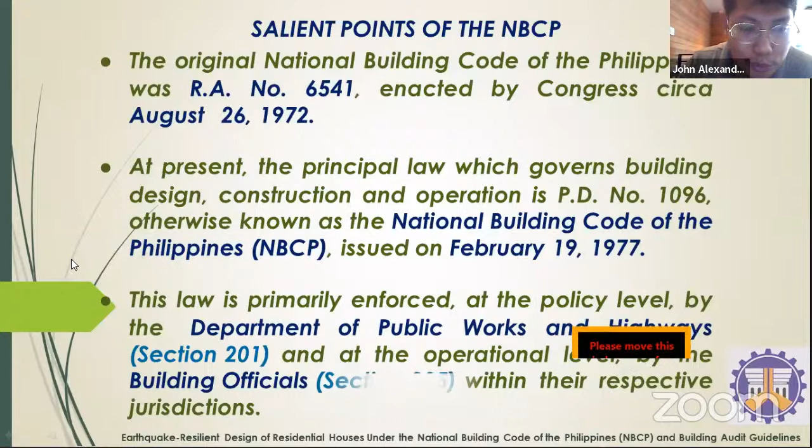Most of the time when you're designing a building and then applying for a permit, mostly it's the personnel of the Office of the Building Official that you interact with.

Among the stated policies of the National Building Code of the Philippines is to safeguard life, health, property, and public welfare, consistent with principles of sound environmental management and control. To this end, it is the purpose of the code to provide for buildings and structures a framework of minimum standards and requirements to regulate and control location, site, design, quality of materials, construction, use, occupancy, and maintenance.

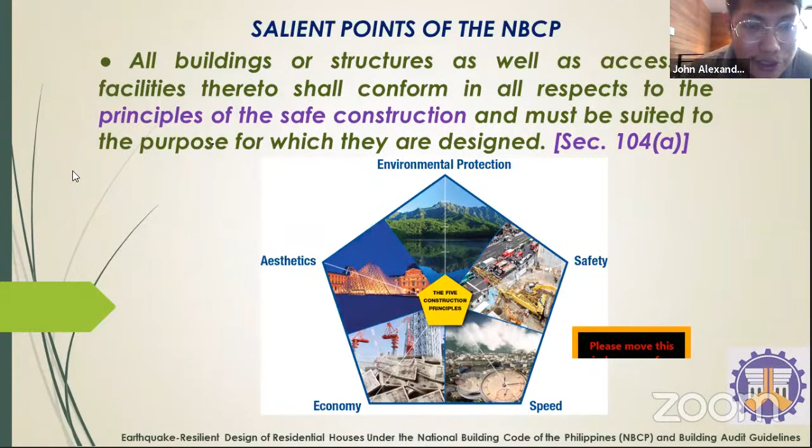All buildings or structures, as well as accessory facilities, shall conform in all respects to principles of safe construction and must be suited to the purpose for which they are designed. So like I mentioned earlier, it's not just safety from earthquakes that's considered. We also have other factors: environmental protection, aesthetics. The building should also look good, not like an eyesore. Then of course economy, safety, and speed. These are some of the principles enshrined in our laws and in construction practice.

So some things we can still discuss since we have the time. The land or site upon which any building, structure, or auxiliary facility will be constructed shall be sanitary, hygienic, and safe.

In case of sites or buildings intended for use as habitation, meaning residential buildings, it shall be a safe distance as determined by authorities from streams or bodies of water or sources of air considered polluted, but more relevantly, from volcanic sites and possibly hazard zones, and any other building considered a potential source of fire and explosion.

So selection of land or site is actually a big factor in ensuring our building is safe from earthquakes. Let's discuss more on residential buildings. Now under the NBCP, according to use and occupancy, residential houses are classified as Group A, residential dwellings.

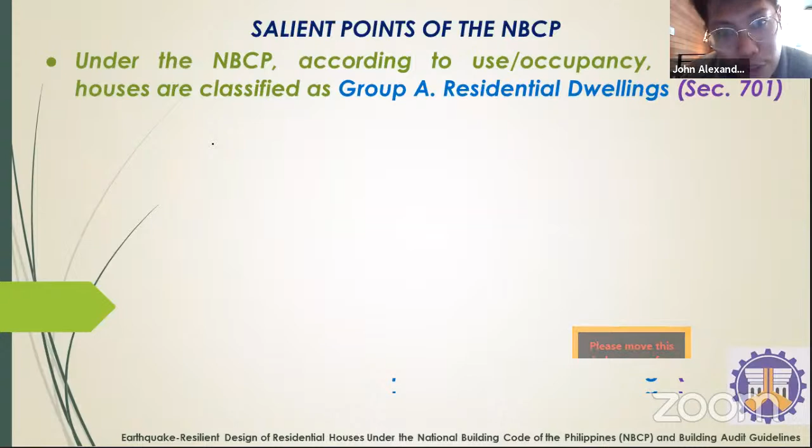Earlier we heard the classification of structures based on materials used. Now we're talking about the legal classification of structures, where they fall under regulations. So residential structures, there are many types: very elegant houses, socialized economic houses, smaller structures, and old buildings. But they're all classified according to whether they're being used as a residence or tirahan. So they're considered Group A residential dwellings.

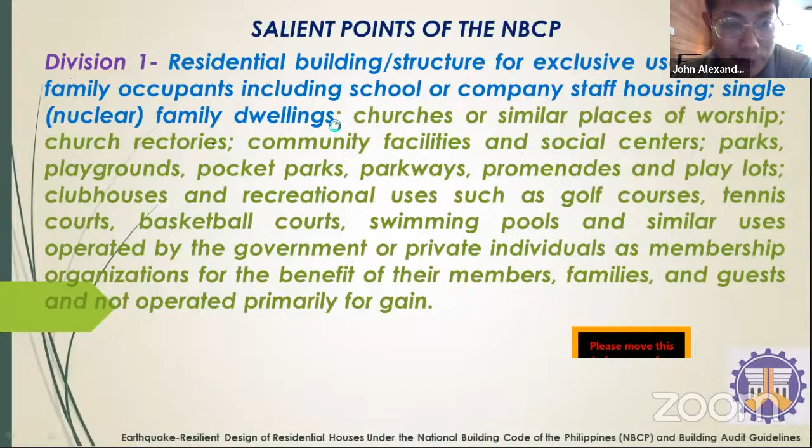There are two classes. Division 1: residential buildings or structures for the exclusive use of single-family occupants, including school or company staff housing, single or nuclear family dwelling. Let's focus on this Division 1, structures for exclusive use of single-family occupants. We also have another kind, non-leasing occupants not exceeding 10 persons, so these are medium-sized houses. Let's focus on Division 1.

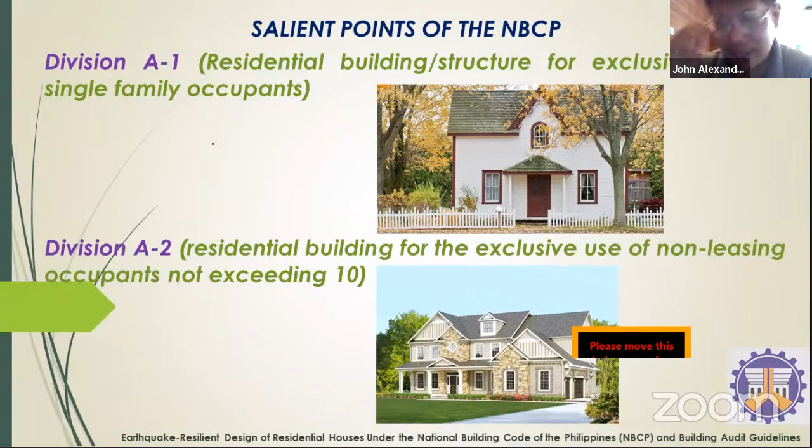We also have Division A1, residential buildings or structures for the exclusive use of single-family occupants, meaning small houses. Then residential buildings for the exclusive use of non-leasing occupants not exceeding 10, somewhat larger houses, again counting the number of occupants. So what are the pertinent building permit application documents?

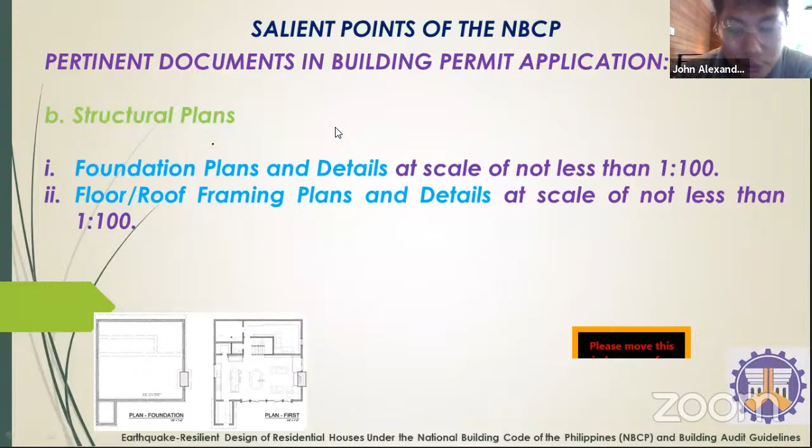Then, very important for earthquake safety, structural plans. We have foundation plans and details at scale not less than 1:100. This matters a lot because it shows how strong our building's foundation is, and this should be reflected in the structural plans. Also important are the floor and roof framing plans and details - it's not just the foundation that matters, we also need strong supports for floors, roofs, and other structural members. Then, the details and schedules of structural and civil work elements, including for deep wells, water reservoirs, pipelines, and sewer systems.

Now, for all buildings and structures, except for one-story single detached buildings with total floor area of 20 square meters or less, we need to submit a structural analysis and design. This should show that the selection of members and materials, the design, and how they will react or interact when force or earthquake loads are applied, is truly sound.

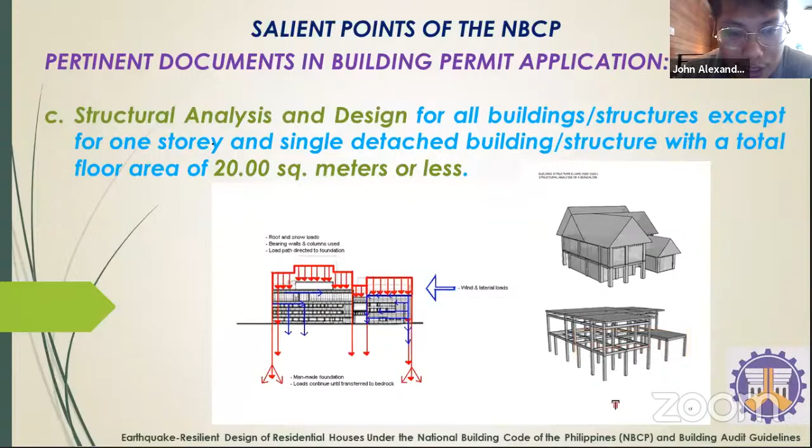Then, boring and load tests are required for 3-story structures or higher. So if your residence is tall, we need a boring test, and if necessary, a load test. The boring test and load test will check the capacity of the soil or strata to bear the necessary weight. This tells us how good the soil is that will serve as the continuum on which we'll place our foundation.

This is in accordance with the applicable latest approved provision of the National Structural Code of the Philippines. This is one reference we use in the building code - the National Structural Code of the Philippines - we'll discuss this a bit later. We seem to be running out of time, so I'll hurry up.

However, adequate soil exploration, including boring and load tests, shall also be required for lower buildings if there's a geological or geotechnical hazard. So if, for example, fault lines are nearby, we can also require boring and load tests even if the building isn't 3-story.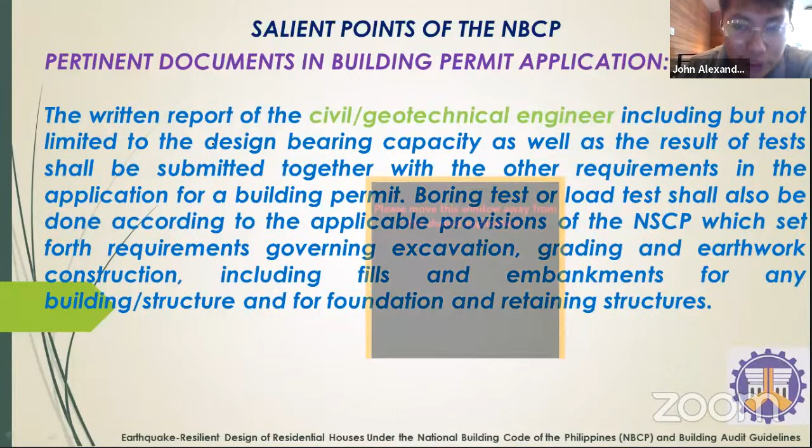Now, the written report of the civil or geotechnical engineer, including but not limited to design bearing capacity, should also be included in our application, as well as the results of the test. This shall be submitted with the other requirements, so it's good to prepare this when we're applying for the building permit.

Seismic analysis is sometimes needed to determine the behavior of the building when specific kinds of earthquakes occur, along with other related documents.

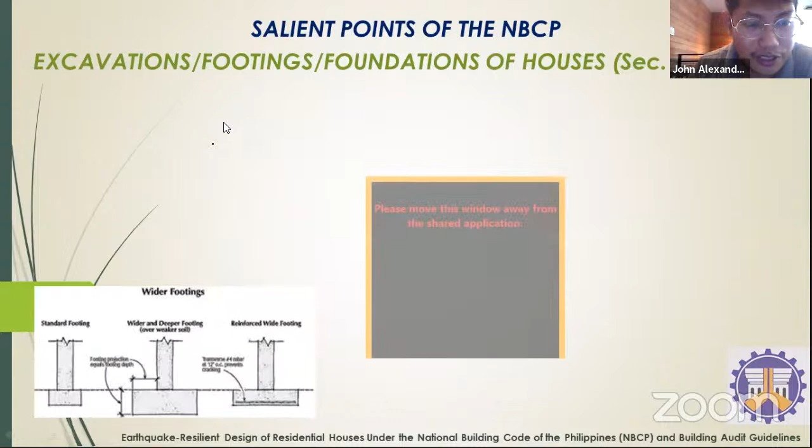Another thing to keep in mind is the excavation of footings and foundations for houses. The footings and foundations shall be of appropriate type, adequate size, and capacity in order to safely sustain superimposed loads under seismic or any condition of external forces that may affect the safety of the structure. It is also the responsibility of the architect and engineer to adopt the type and design of the same in accordance with the standards set by the secretary.

So let's conclude our discussion for now. We have additional references here - RA 10121, which is the Strengthening of the Philippine Disaster Risk Reduction and Management System, providing for a national disaster risk reduction management framework. For everyone's information, this isn't law yet, but there's a Philippine Building Act currently being discussed by Congress. It will impose what we call Build Back Better - so for those of us who lost our homes or had them demolished, not just due to natural disasters but voluntarily, we'll be required to build back better, meaning what we rebuild should be better than the original. Those are some principles we'll see in the future.

Now, this one - the National Structural Code of the Philippines, or NSCP. I called the Association of Structural Engineers of the Philippines about this. Actually, it's proprietary, so sadly, even though it contains a lot of helpful information.

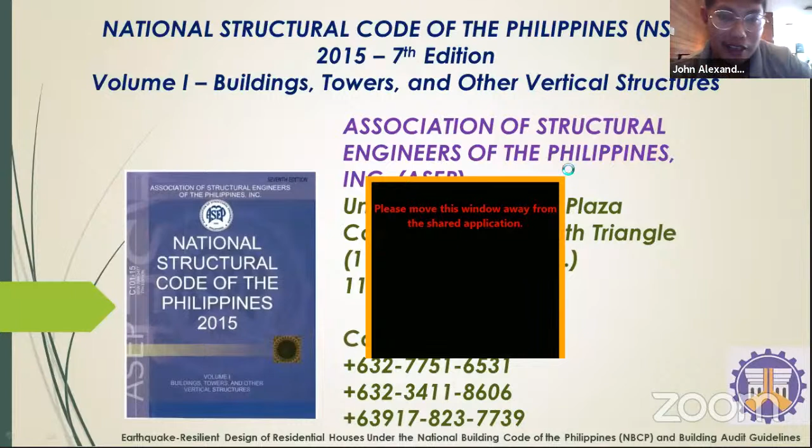This is one of the references we use, one of the references used by our building code, and it has a lot of information. There are many formulas you'll see here, and a lot of details discussing how to strengthen the structure. Unfortunately, I can't discuss this right now since it's quite voluminous, and we have more competent and qualified personnel who can pour over the individual lines. This is actually proprietary, our NSCP, although you can purchase copies at ASEP, since they're the official distributors.

For your information, this is approved as a referral code of the NBCP, the National Structural Code. So this is actually a very good reference for additional information on how to strengthen a building.

So that's where our PowerPoint ends, but before we finish, I'd like to show you some things. I have some resources here. Actually, we don't have what's called a formal kind of building audit, or an official issuance that's strictly followed. But to give you some idea, I've taken the liberty of using some of the forms we have in the office. We have what's called a safety assessment form.

We're a bit short on time to discuss all of this, but this is a way of determining how safe our buildings are. We have several more forms that we use. There's one for inspection of concrete structures, then masonry structures as well - we discussed the types of structures earlier. There's some useful information here, then the inspection procedure.

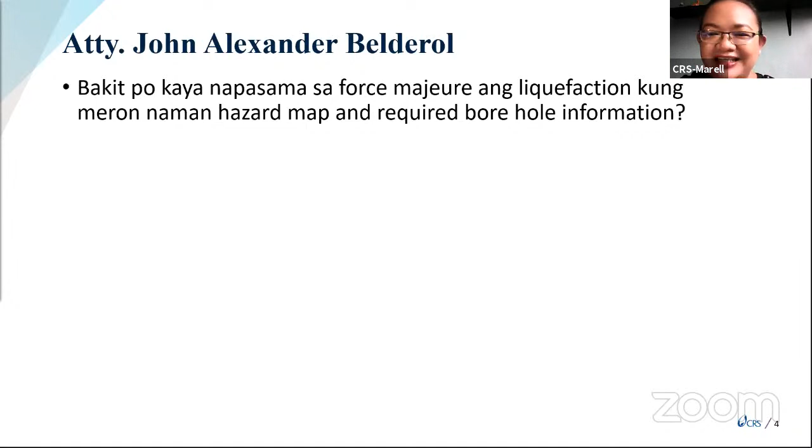Okay, maraming salamat po dun sa sagot. Nasabi po niya na hindi naman po tayo helpless in that situation. Although na-explain niya po kung bakit force majeure ang liquefaction, pero magagawa naman po ito ng pamamaraan ng mitigation strategy sa pamamagitan ng proper engineering techniques, yung design sa pag-develop ng site. So there you go, yun po yung sagot ni Attorney John.

For our next question, partner: pag single story made of masonry or zocalo with wood, kailangan pa bang mag-apply ng building permit for construction? Ano po ang nakasaad sa batas?

Haba, sub-questions to. Okay, thank you for that question. Kasi actually, I didn't think I would get the opportunity to discuss a little bit more of the building code. Kasi yung orientation naman po ng ating series right now is more on really strengthening the structures, and this is more on general discussion sa building code.

So na-discuss po kanina yung mga types of structures when it comes to construction. Ang nakalagay po sa ating code, any kind of building construction po, kailangan po talaga ng building permit. Exceptions, yung tinatawag po nating traditional and indigenous, that's the first one.

Naka-define po yun kung magkano yun. I think it's a very measly amount of 15,000 pesos. Pero yung amount is intended to be raised once the Philippine Building Act is passed sometime this year or maybe next year. Hindi na po siya magiging 15,000.